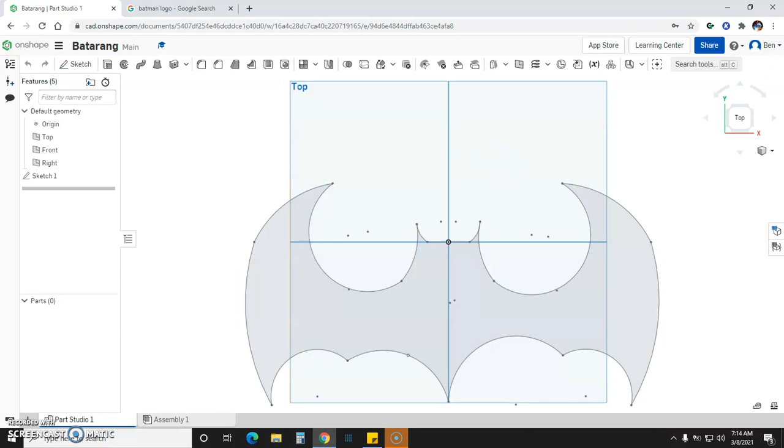I think the rest of my dimensions are almost spot on, but this, I got the reference for this radius wrong, and so it's messed up. So I have to go back and change that, or I could just use the mirror function and do half the work. So let me show you how to do that. Alright, we're going to make it a Batarang. Looks basically like this. I'm going to show you how to use mirror, and I'm going to show you how to use this reference plane, because that's an important part of using the mirror function.

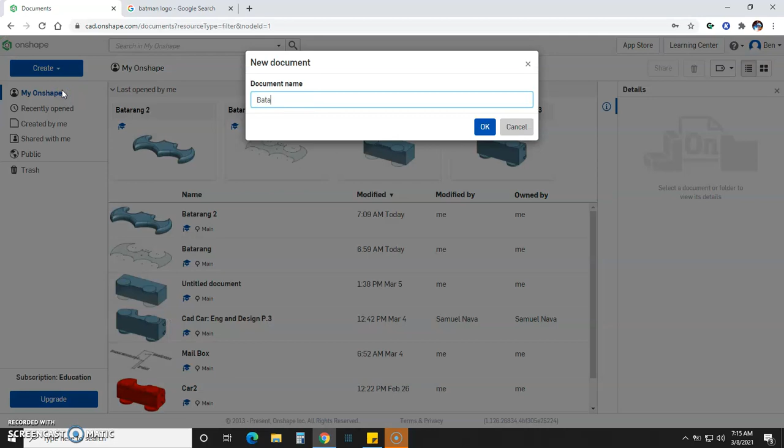So let's start by just creating a new document. I'm going to call it Batarang 3, because third time's the charm. And there we go. Okay, so I'm going to orient this to my top reference here, and I'm going to get rid of the front reference plane because I'm not going to need it. Actually, no, I'm going to leave it in place while I'm drawing because it is a good reference while I'm drawing, and then I'll get rid of it when I'm using my mirror function here.

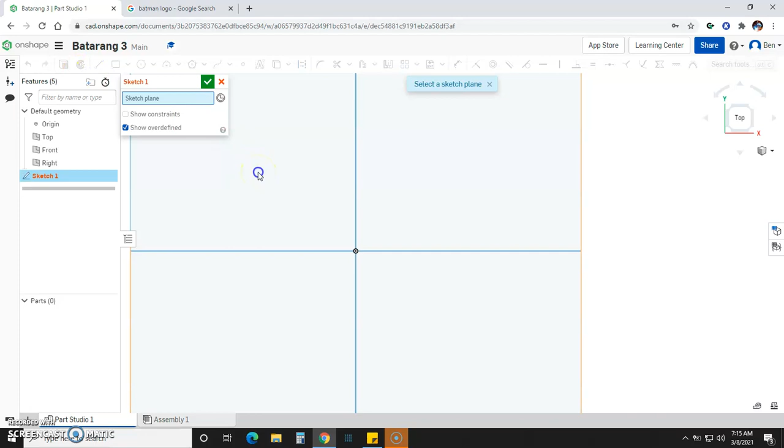So, first thing we're going to do is we're going to draw half of our Batman logo. So I'm going to start with Sketch. I'm going to select Sketch. I'm going to select my sketch plane, which is just going to be the top surface here. And I'm going to start by drawing my little Batman logo. In case you need a reminder, this is what your Batman logo looks like. So it's going to be flat across the top, and then we're going to go to an ear. So I'm going to start with a flat line. I'm going to go out, say, 9 millimeters. I'm going to change that to 9 by typing in a 9, and there we go.

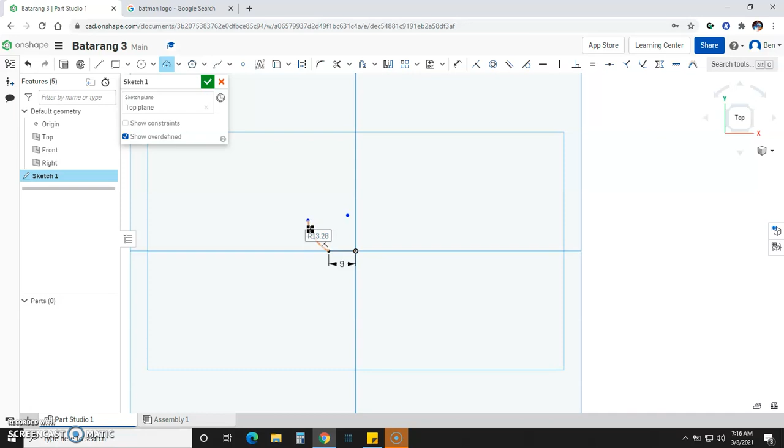Okay, from here, I am going to select my 3-point arc, and I'm going to make sure I reconnect to my little line segment here. I'm going to go up, and there. I want it like so. So we're going to set our radius there to 13, and be done with it. Okay, so again, that's this part of our Batman logo.

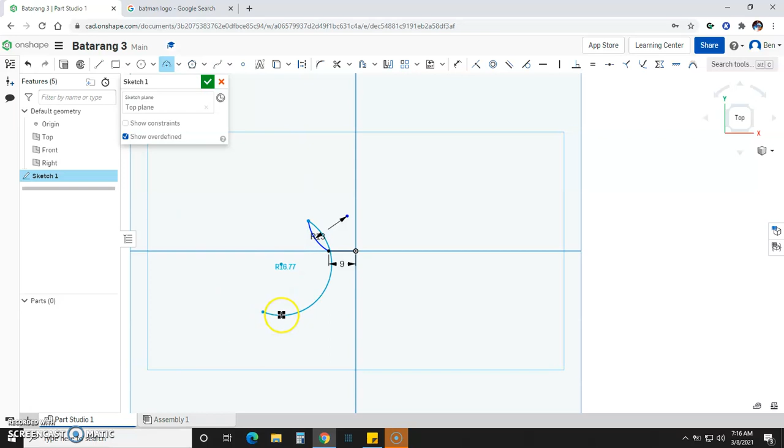So from there, we need to make this part right here. So I am going to again use my 3-point arc. I'm going to go here. I'm going to go down to here. Whoa! There we go. We're going to call that a radius of 30. Now we're going to make the second half of it, where it's going to come up to about here. Now I think that the wings go slightly above his little... Actually, no, they're parallel. Okay, well, let's make them parallel then.

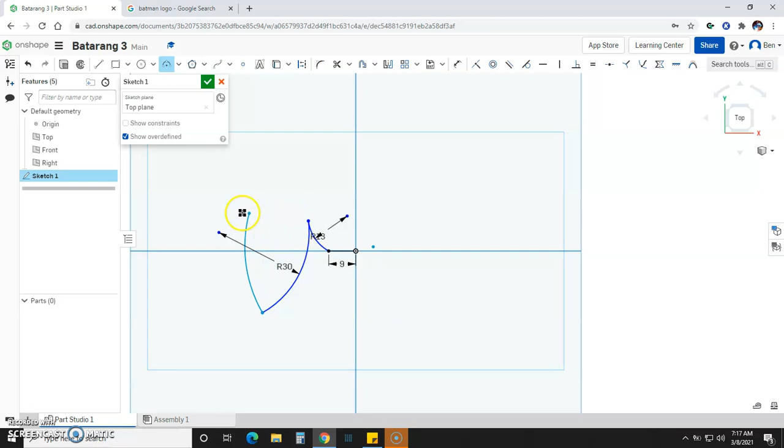Alright, so we're going to go here. Go here. We see I get a little parallel line here. Zoop, zoop. There we go. And we'll put it right there for good measure. And then we're going to make that a radius of 21. There you go. Okay. So far so good, right? So now we've got the first part of our little Batman logo.

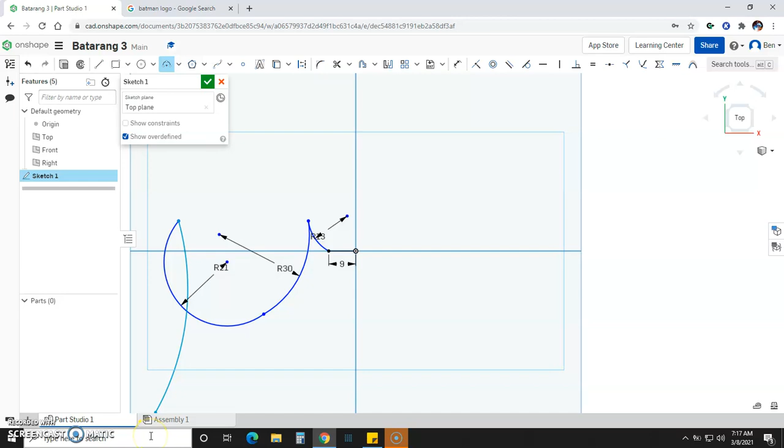Now we have to create the back part of the wing. So we're going to click here. We're going to go all the way down. I'm going to zoom out a little bit actually. Pan up. Go. And that's going to go to right there. But then we're going to pop it out like so. And we're going to make it a radius of 50.

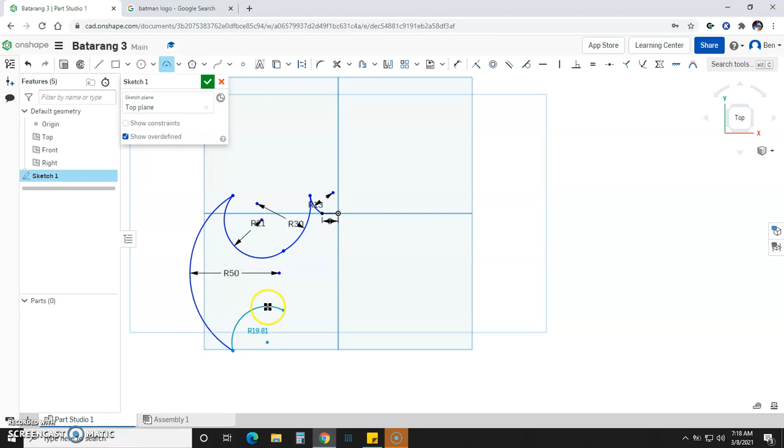There we go. Now, we're just going to do something similar on the back side here. We're going to go up and in. That one. And we're going to make that one 21 radius as well. So this curve is the same, just for the sake of symmetry.

And now we have to make the bottom of our Batman logo, which is this pointy part right here. So we're going to click here and then go down to right there. And we're going to pop that in just a tiny little bit. We want that to be an extension of the other line. So we'll make that 46. How about? There we go. Okay. Now we've got half a Batman logo.

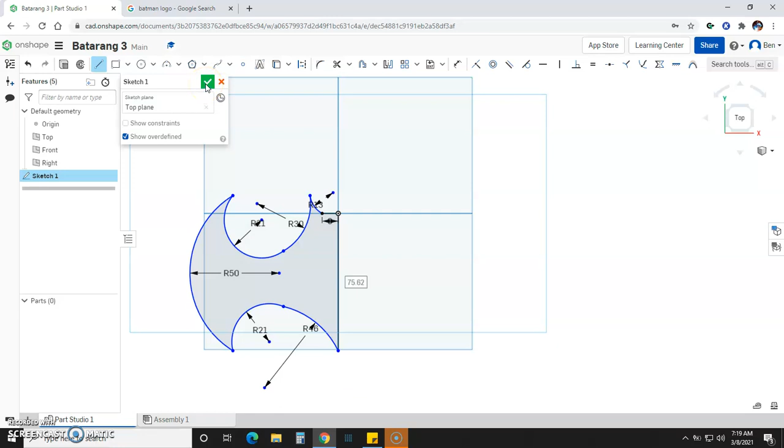So the only other thing we need to do is take a line and connect this part to this part right here. And we've got a whole completed shape, which is now turned dark, so we can extrude it. So I'm going to click my green button. I'm going to be done with this sketch. I'm going to get rid of my front reference plane now because I don't want it there anymore.

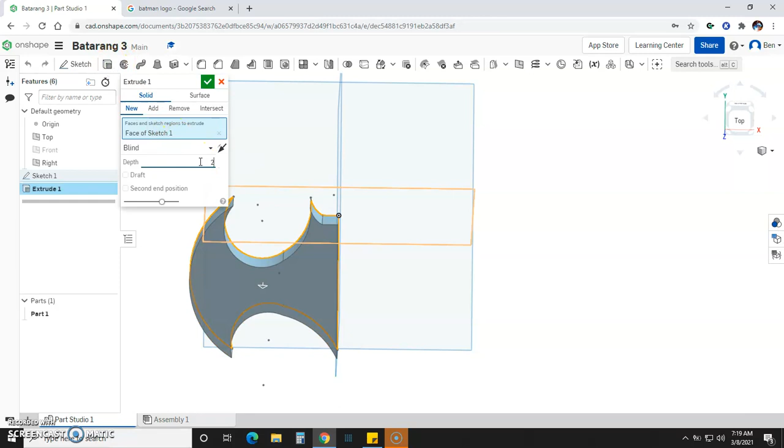And I am going to extrude this shape. So I'm going to click on it. I'm going to click extrude, and I'm going to extrude it out 20 millimeters. All right, now from here, I've got half a Batman logo. I need to make the other half of it.

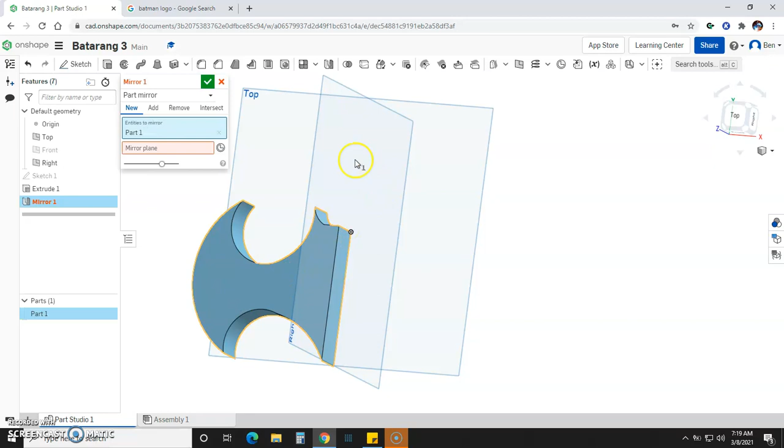So I'm going to use my mirror function, which is up here. I'm going to click mirror. I'm going to select my entity to mirror, which is my Batman logo right here. Now I'm going to select my mirror plane, which is here. And you see it's made a copy for me.

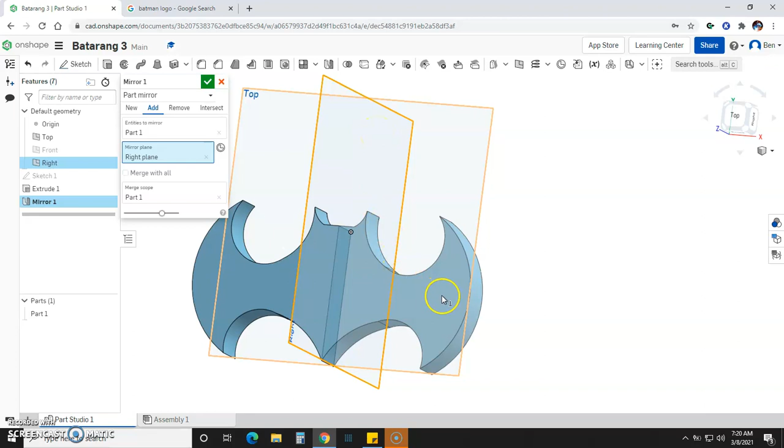So again, I just select the item I want to copy. I select the mirror plane, which is going to be one of your reference planes, unless you've created an alternate reference plane. And then it will just make the copy for you. And you click OK, and we're done. And looky there, you've got yourself a symmetrical Batman logo. And you didn't have to go to all kinds of crazy pains to make it symmetrical.

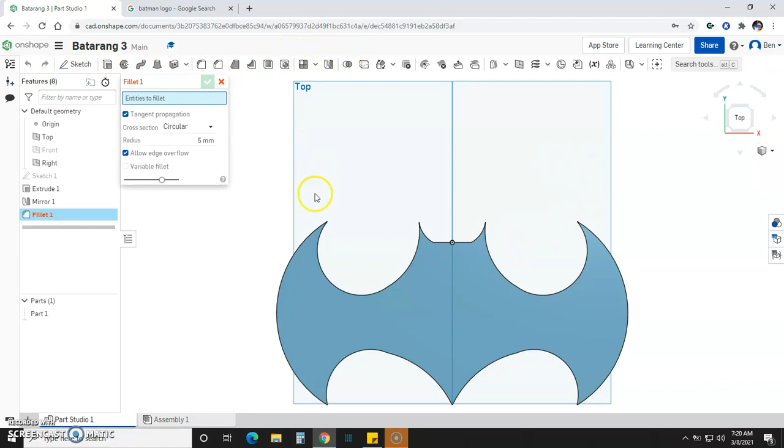Now, admittedly, this line right here is a little bit wonky. Could have done a better job on the curve of that. But outside of that, it's a decent Batman logo, right? And so from here, we can fillet it and make it look a little bit more Batman-y.

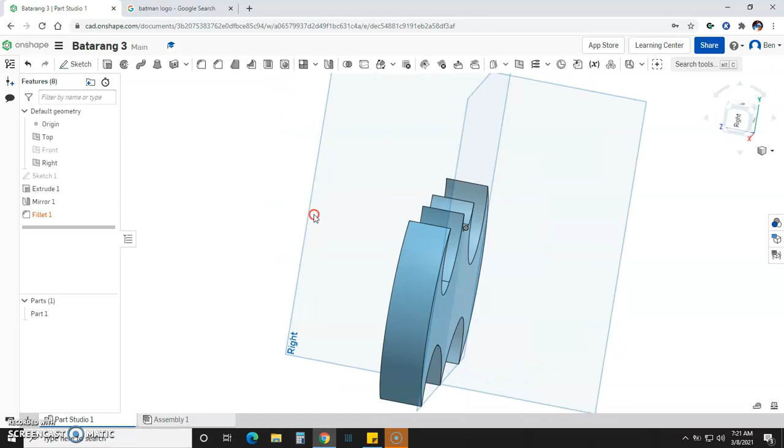I'm going to click all my lines on this side. Boom, boom. Boom. And then I'm going to flip it over. I'll do the same thing on the back side. There, perfect. Now I'm going to set my fillet radius to 5 millimeters, and I'm going to click OK. And I'm not going to get a fillet for some reason.

Nice. Here, let me pause it. We'll try that again. All right, I'm filleting the second time. I'm going to select all parts this time. I didn't select these little curved parts, and I think it made it angry. For whatever reason, I was able to fillet it previously without selecting those little bat horns, if you will, but in this instance I will.

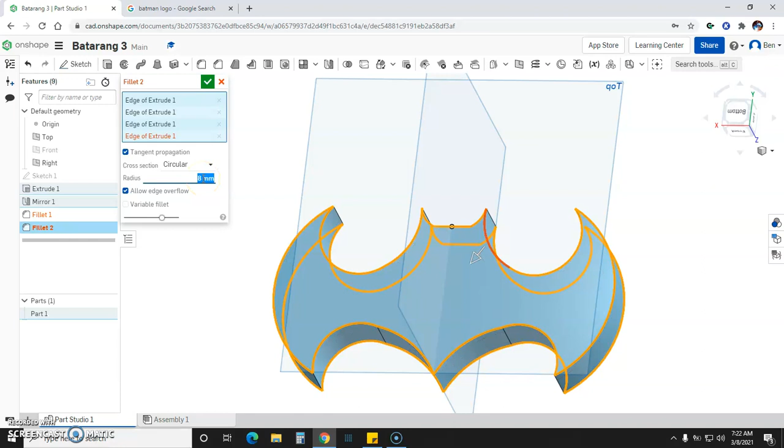Just here we go. Go, and then one last curve. There. Okay, let's set this to 8. See what that looks like now. Oh, I see. They don't want to do it 8 for some reason. We're getting an error. Okay, so let's set this back to 5. What does 5 look like? Do we need to...

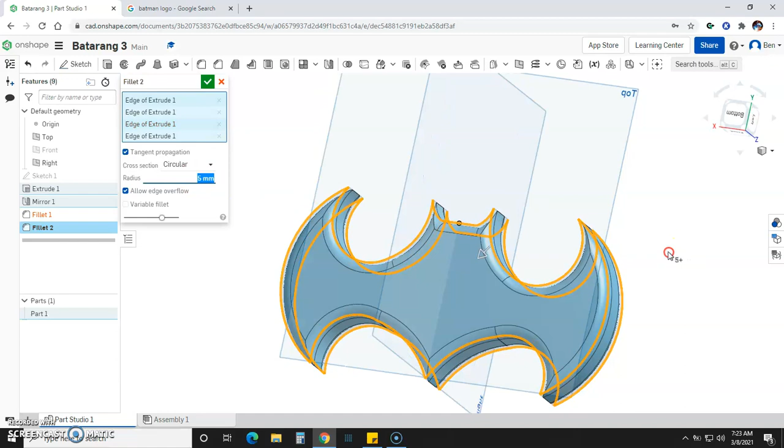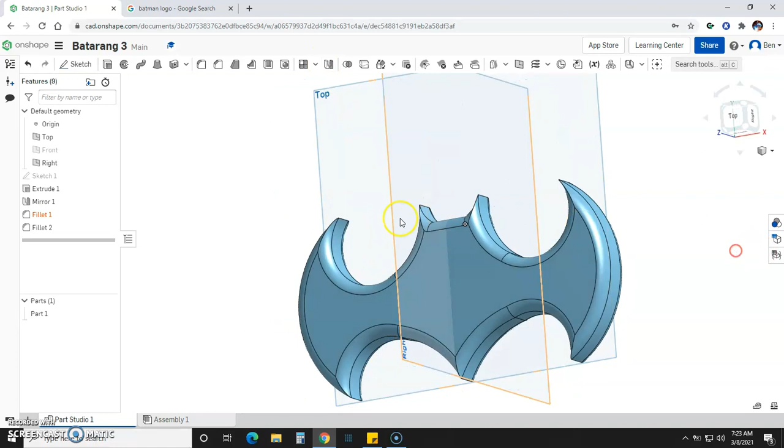But that is how you make your Batman logo. So again, you draw half of it. You use your mirror function. Don't forget that you're going to select the object, then you're going to select the plane, and then you fillet it, and there you have it.